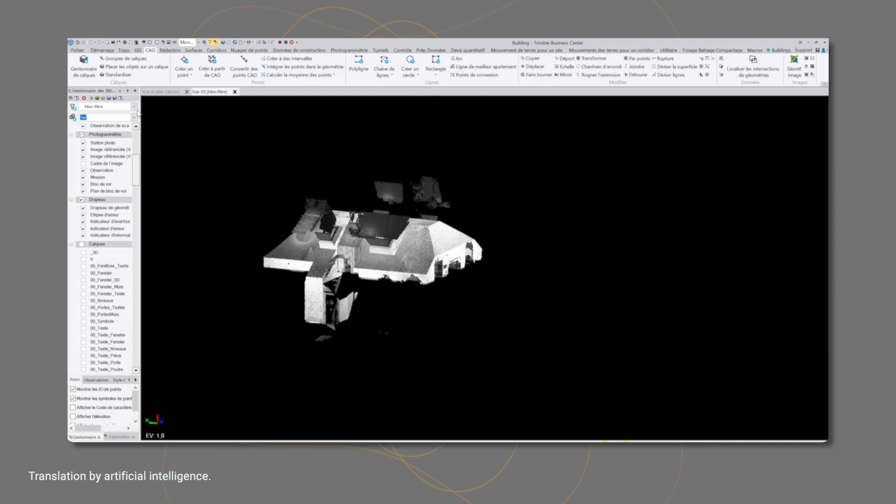For the magic part, we now have our data in TBC, and I will explain the operating principle of the buildings module dedicated to indoor surveys. Thanks to the tags I created directly in the field, these are keywords that I associated with each of my scan positions, I will be able to quickly filter my data in the TBC software.

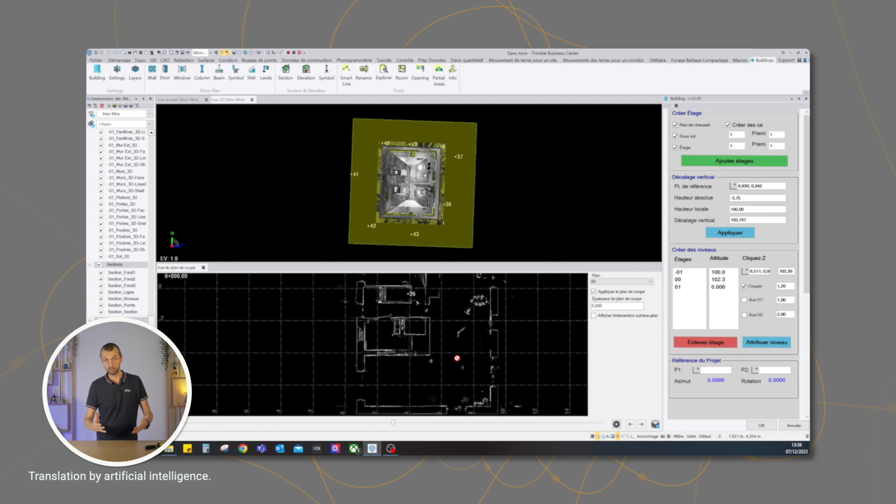Through a cross-section, we will define the different levels that will make up our house, so here the basement, the ground floor, and the first floor. This step will generate multiple cutting plans for us, so our cutting plan tab, and it will also generate all the layers that will be utilized to receive the various elements that we will draw during the process.

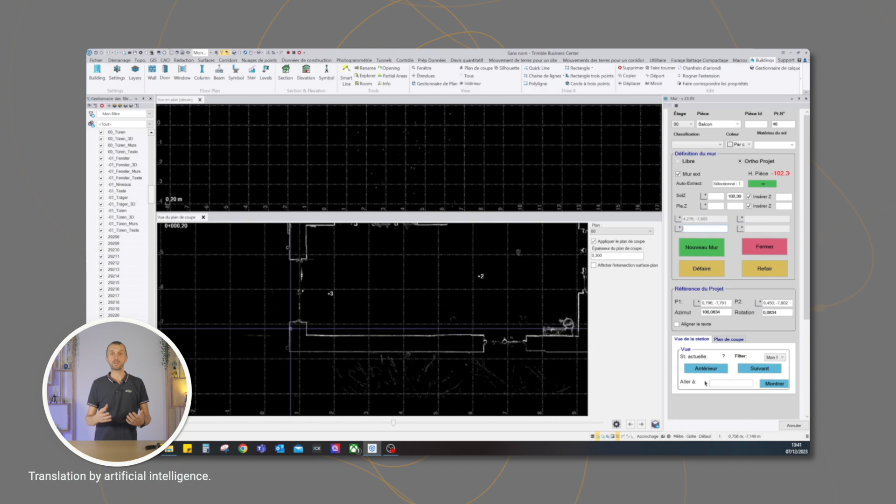Once that is done, we are ready to execute our plan. We will begin with the creation of the exterior wall. We check the small box, click on new wall, go click on exterior walls before clicking on close. And here we can see our wall appearing in green color.

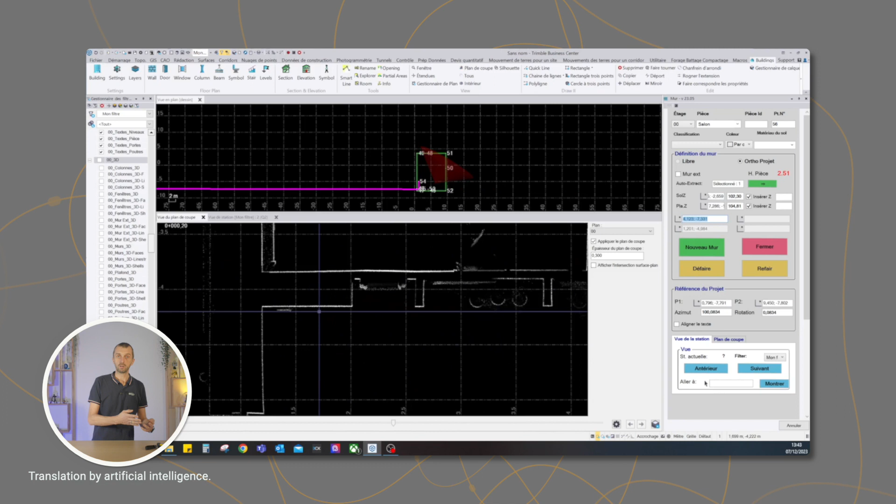Okay, that is completed. Now we can proceed to the interior part of the project. We will assign a name to the piece that we desire to draw. Through the station view, we define the floor Z, the ceiling Z, and we start drawing our room by clicking on the walls. We will have two methods for this, either the free method, by clicking 2 points per wall, or the ortho projection method, like here, where we will only click 1 point per wall.

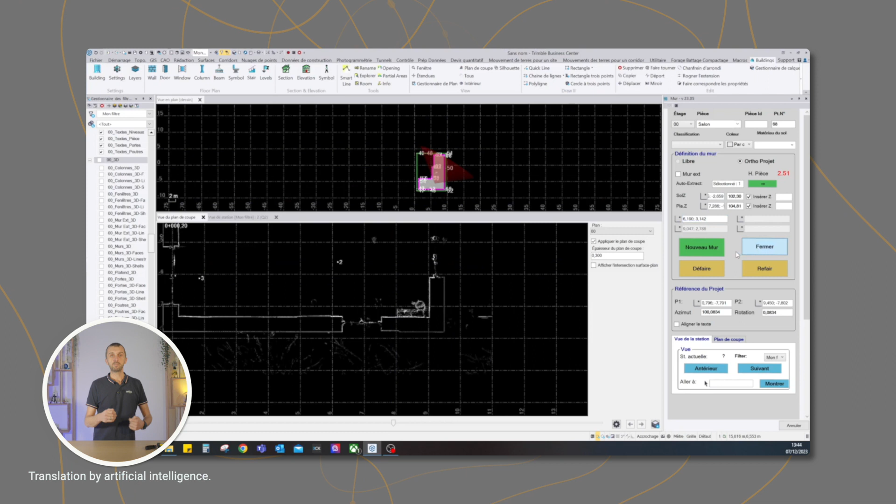When you click on the close button, Buildings will close the room and integrate it automatically, along with the perimeter, area and height of the ceiling space. And we will be able to create all our pieces like this.

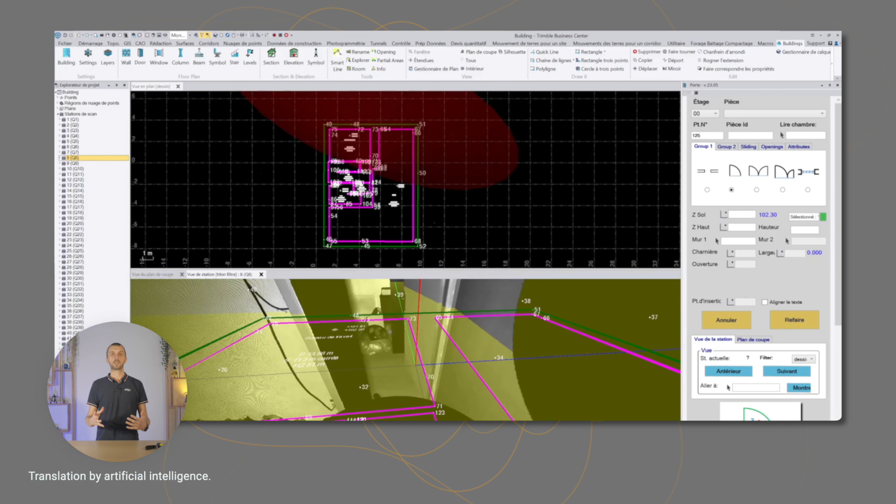Once the pieces are created, we will be able to integrate doors and windows accordingly. For doors, we visit the Doors tab, select our door model, and click Z Sol, Z Haut, Wall 1, Wall 2. The hinge, width and opening direction, as well as the door, are designed with all the necessary information.

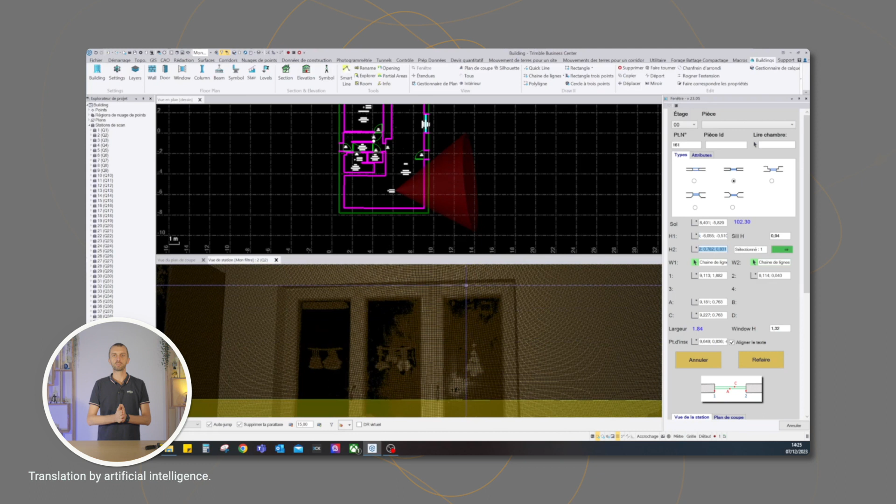Same goes for windows. We go to the Windows tab, choose our window model, and with a few clicks we will be able to position our elements in a simple and fast way. A small, very practical thing: there is a small diagram at the bottom of each window that explains what the different fields we will have to click correspond to.

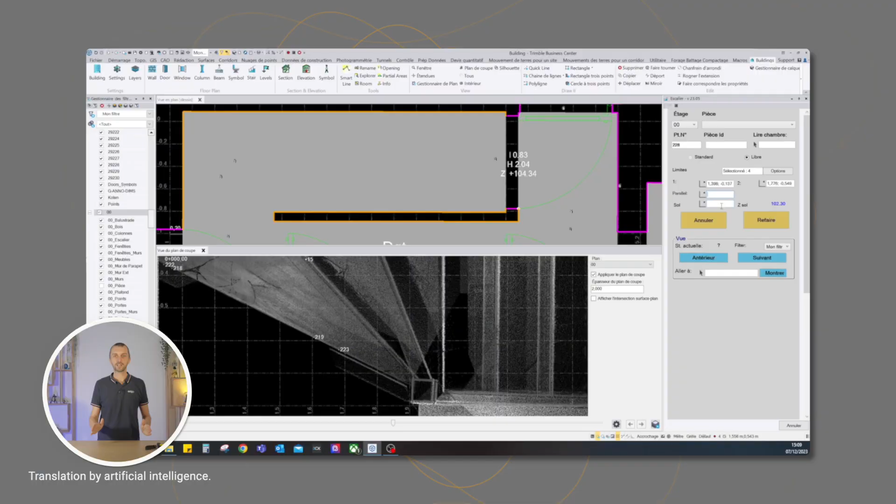We then move on to the stairs. Same, everything is very well thought out. We will define the walls of the staircase cage and then click on the different steps. There you go, stairs take form. It is as simple as that.

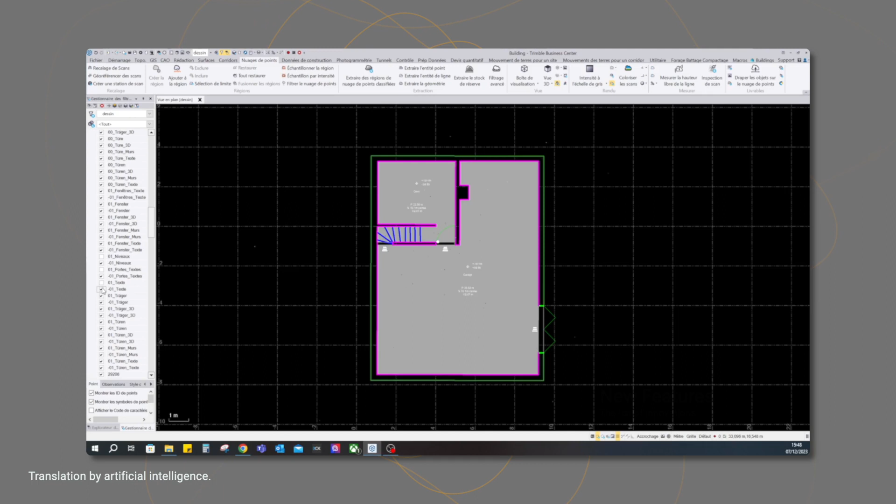There is nothing remaining to do at this moment except to install an essential toilet, a sink, and that is it. We will proceed in the same manner for the basement and the first floor. A small amount of beautification and we will obtain the plan of our 3 levels in this manner, just like this example shows. It's not bad, but it's not everything.

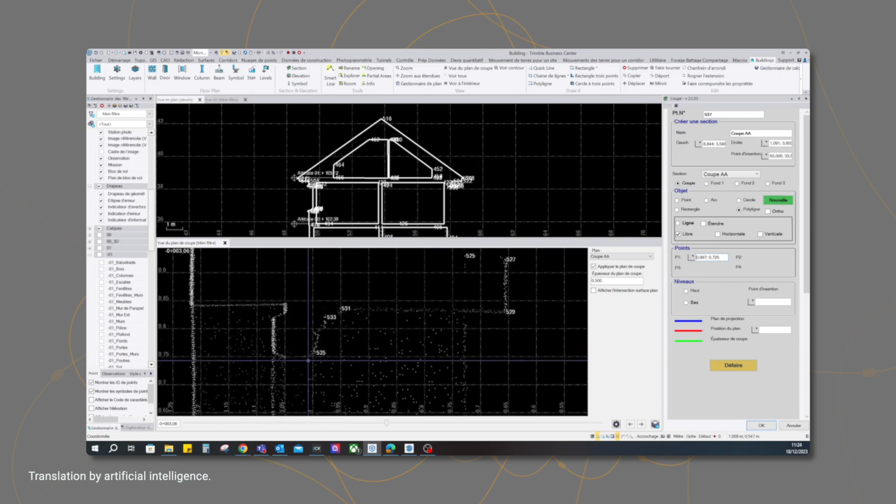Because since the last version of the Buildings module, you will also have the possibility to manage all your vertical cuts. Using the Sections tab, you can manage and insert all vertical cuts by inserting different objects: arcs, circles, rectangles, or even polylines. You will be able to work with different projection plans and different cutting thicknesses to create all your vertical plans.

And once you have done all that, you will have several possibilities. Either create all your cartridge templates in TBC and manage layout and quoting in TBC, then print your plans directly from TBC, or alternatively, export all of this data directly into your typical CAD software and perform your layout tasks within the CAD software.

And there, I think you'll tell me, Nico, what may not be a bad idea is exporting all of this into 3D.

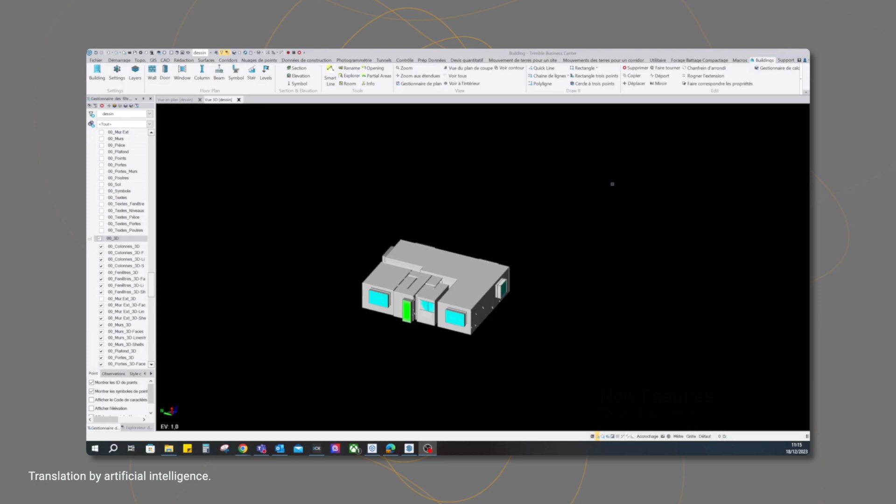Well, just so you know... ah shoot, I had it, but now it's gone. Be aware that Trimble Buildings does not solely operate in a 2-dimensional format. In parallel, it creates all the walls that you click on in a 3D format, and you can export them in SketchUp format to create your model in Trimble SketchUp.

So that's it for this interior design plan creation. If we do a quick recap, it took about 1 hour and 40 minutes for data acquisition. We spent about 15 minutes for export plus import in TBC, and the processing part in TBC, which I haven't mentioned yet, represents about 45 minutes to arrive at the 3 plans I showed you just before, making a total of 2 hours and 40 minutes.

Arrived on site, 8:30 a.m., plan delivered before noon. I told you, he's a great professional. It is still truly magical.